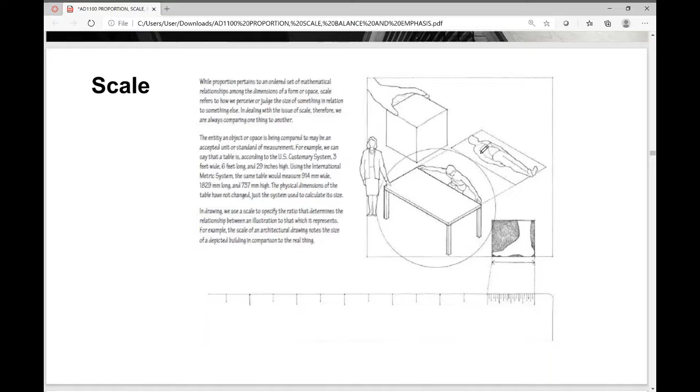So an entity, an object, or space being compared to or accepted as a standard unit of measurement. This is more or less data-driven and statistics-driven to serve a mass or huge population. For example, we can say that a table is, according to US customary units, 3 feet wide, 6 feet long, and 29 inches high.

Using the international metric system, as explained here, the same table would measure 914 mm wide, 1829 mm long, and 737 mm high. So this is in relation to the US customary system and the metric system.

In drawings, we use scale to specify the ratio that determines the relationship between an illustration and what it really represents in actuality. So in architecture, interior design, and even landscape drawing, we draw in scales to have a representation of what it actually is, what it is perceived to be in actual scale.

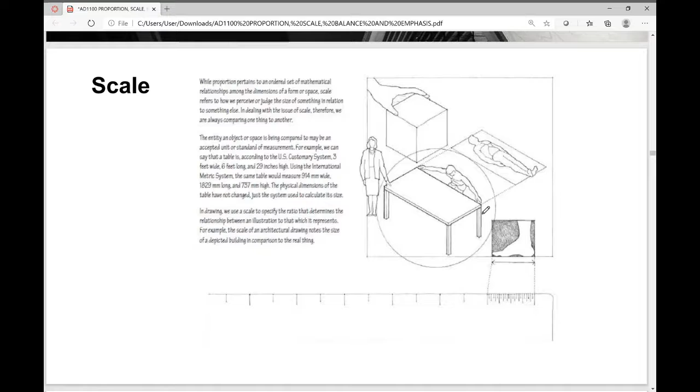So maybe you'll be drawing rooms at a scale of 1 is to 100, and how that actually translates into human form, which is 1 is to 1. That's the actual human form in scaling.

Some examples: doorways and windows may be scaled to the dimension of the space, while sill heights and wainscot retain a human scale. In this photo, you can see the doorway is actually expressed to be scaled with regards to the space.

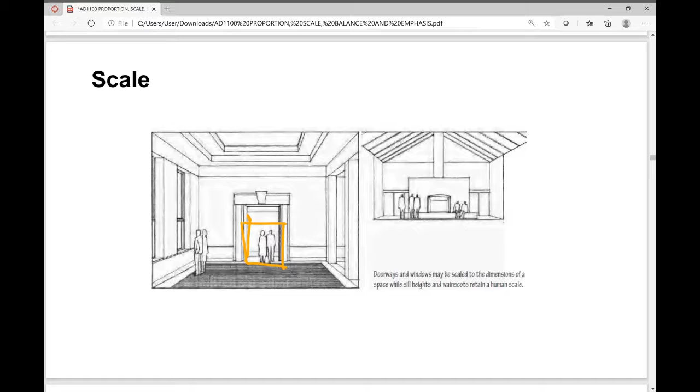If I design a space where the door is only up to here, it actually takes away from the scale and the proportion of the space. Given that I have higher walls, I should, in scale, provide a larger opening. So that is the solution for the first one.

So you have to scale up some elements to create this composition or proportioning of the space. For example, on your right, you have this scale, and you create a proportion—what's designed here is the fireplace. You create a proportion or a composition.

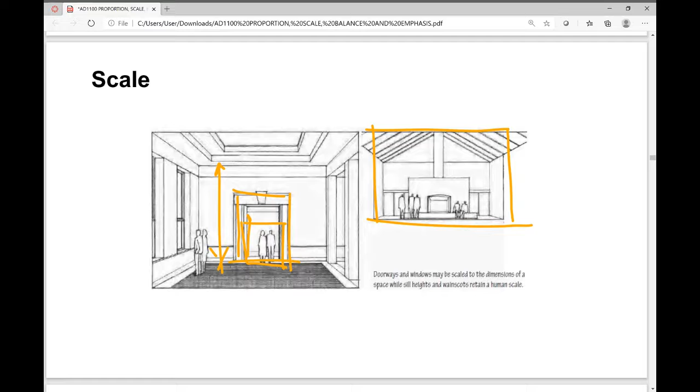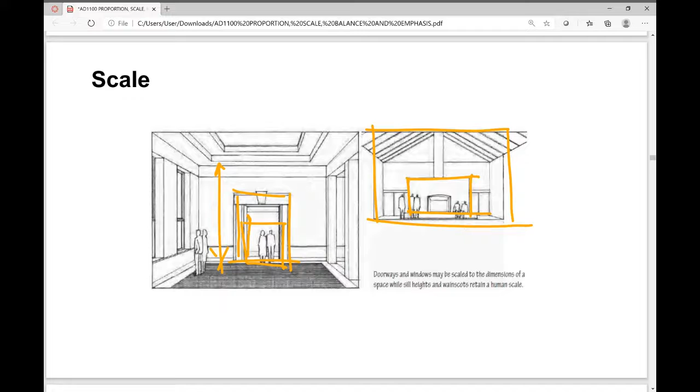That is related, or closely related, to retaining the human scale. This one, since the fireplace is up to human scale or for human usage, that's why you have to adjust it to create that balance. So you have different scales.

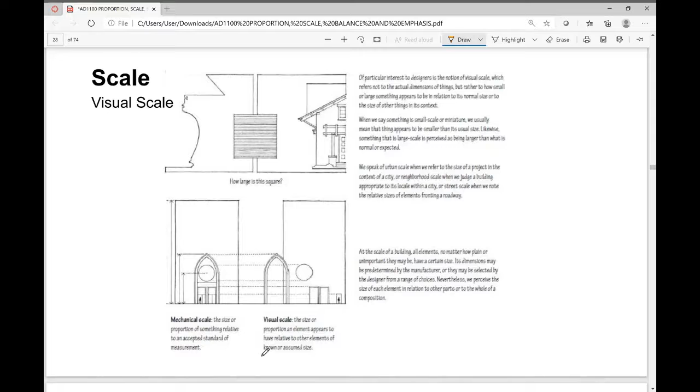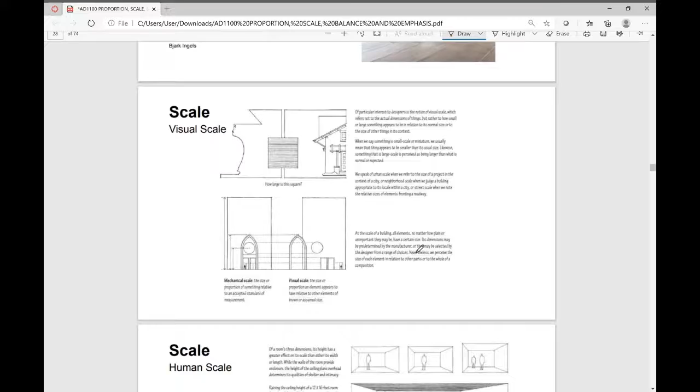So you have your visual scale - your mechanical scale and your visual scale. Mechanical scale is the size or proportion of something relative to accepted standards of measurement. Visual scale is the size or proportion of an element relative to other elements. So with mechanical scale you consider the proportion against the acceptable standard, and with visual scale, the proportion it appears to have in relation to the other elements.

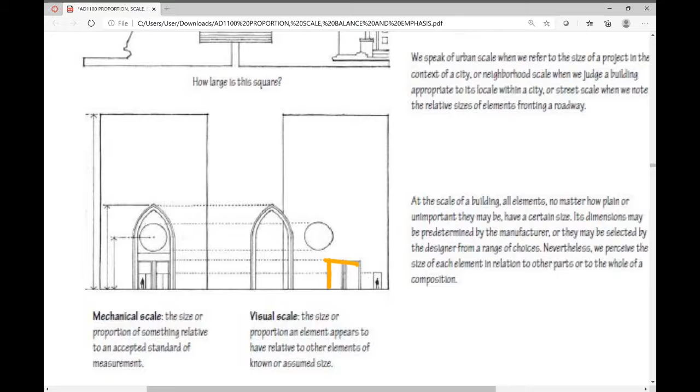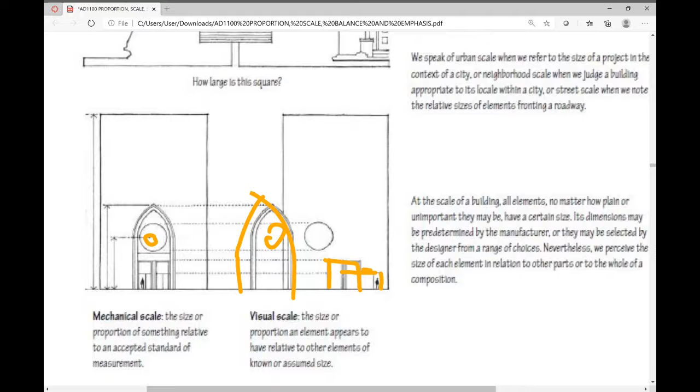So this would be your mechanical scale, and this is your human scale - something acceptable to humans, or to the standard set for measurements, your anthropometric standard. Then visual scale is the proportion elements have in relationship with each other. If I draw a smaller circle here, it doesn't really create that same feeling - it doesn't have the visual appeal of the previous design.

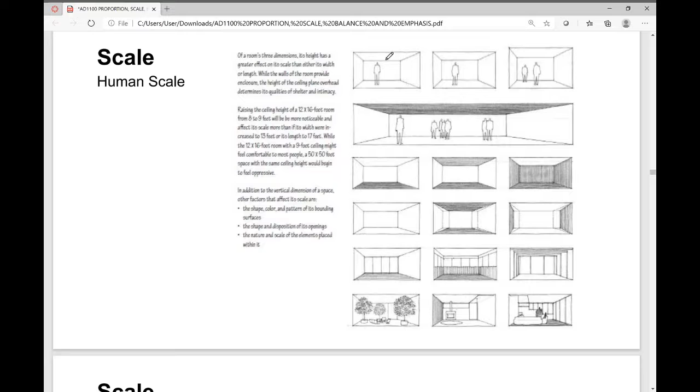So you have your human scale. Of a room's three dimensions, the height has a greater effect on its scale than the width or length. This is very prevalent with walls in interiors. The rooms provide enclosure, so the ceiling plane overhead determines the qualities of shelter and intimacy. This guides how we scale to the human scale.

So for this one it's basically having that space - these are plain walls, and as you can see it looks more wide and bright. This one is more elongated, it feels elongated, and this one as well. When you adjust the height, there's a feeling, an experience that is more airy, or more airy and higher.

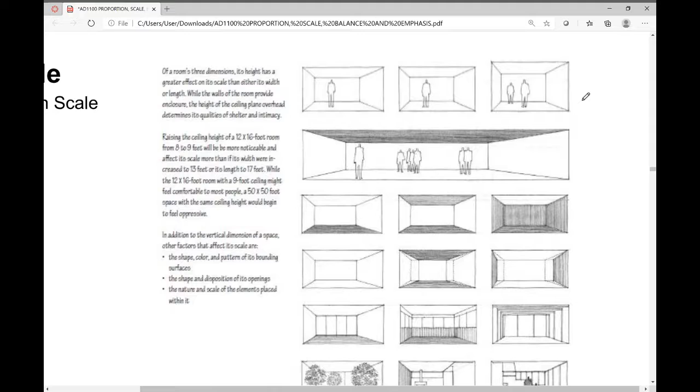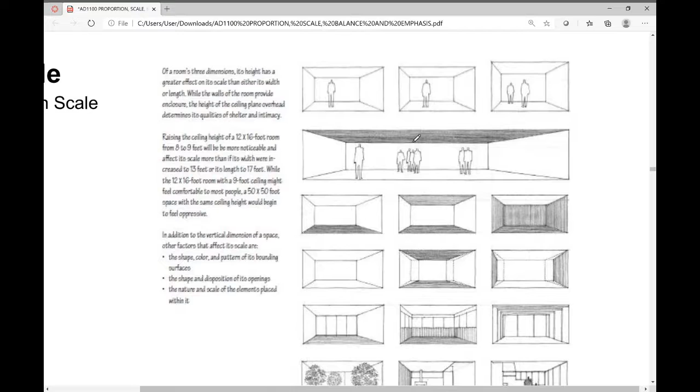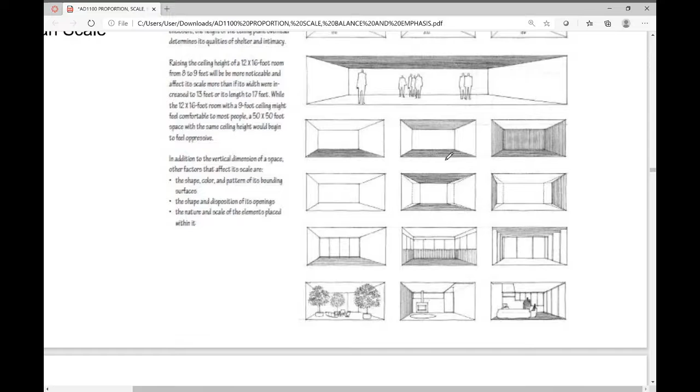This is very prevalent in architecture as well - when you create a darker ceiling, it actually feels like it's coming at you, closing down, or heavy-weighted. This is also prevalent in interiors with darker flooring. So when both the ceiling and the floor are textured or very dark in scale, it actually makes the room feel smaller.

So this one you have higher - it feels like it's higher. This one is just enclosing on you. This one is weighted on all sides, so you have this constant tension pulling towards the room.

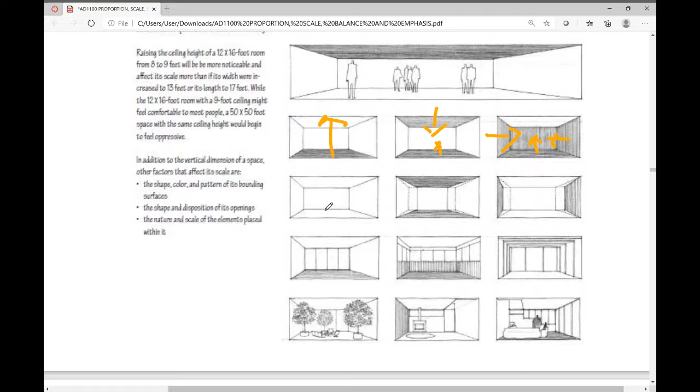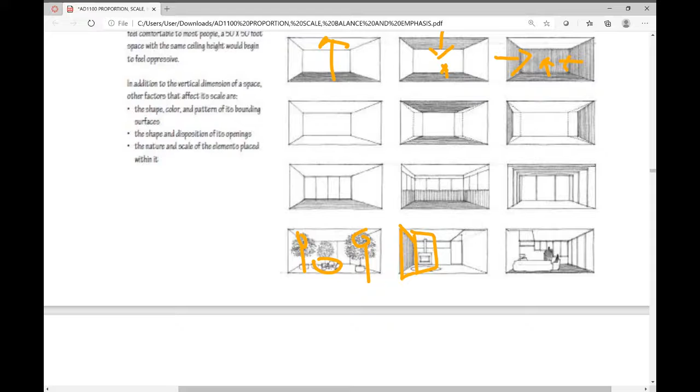Same with the rest of the application - that's why we have to make balance with regards to the human scale. As you can see here, the trees are creating a direct relationship with the human scale in the seating in the middle. With this one, you have the scale of the fireplace and wall in relation to a human scale, and this one as well - various degrees of human scale applied to interiors.

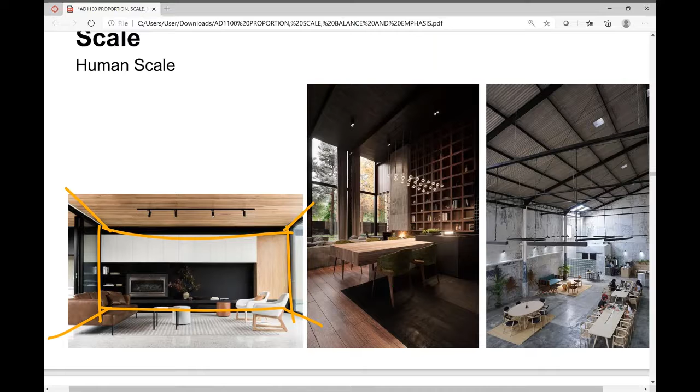So here are some examples - we have this as a human scale. As you can see, the form of the room is dictating the space, so everything should be in proportion - everything is lower or shorter, even the cabinetry, how it's planned out.

This one as well is a more higher approach, or higher ceiling - in proportion, even if it has a dark ceiling, it's perceived as high due to the verticality in scale.

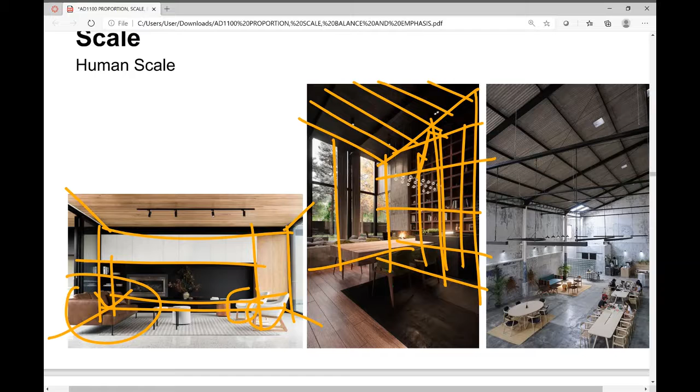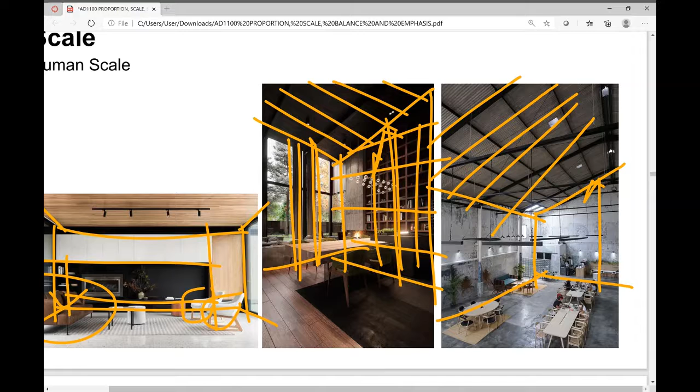Even this one - this is a visual scale as well, and this also is a direct visual scale. You can see the vastness of the space, the height, even the material - it's not as dark, and it matches, with the walls basically of the same finish. That's why it's perceived as larger, or much more airy and lighter.